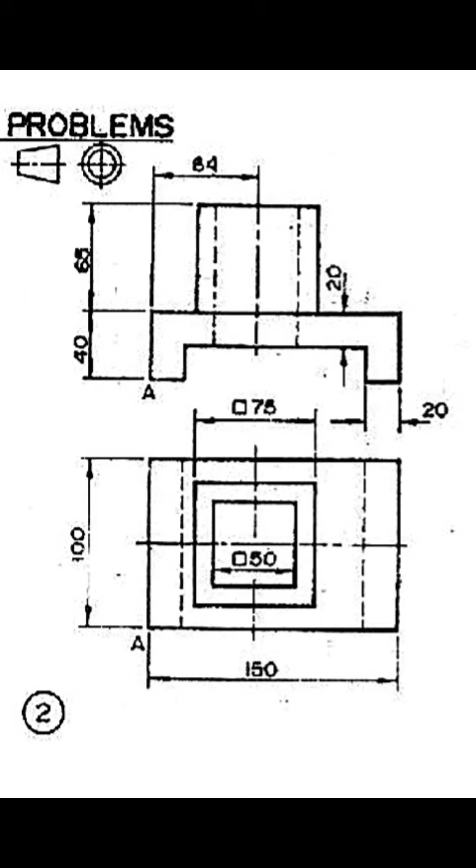In this question, we are given an orthographic projection, and we have to get it in isometric form. So if that is the diagram, then the sketch means we are going to have something like this. So with this sketch now being for the side view, I can sketch it to get it in isometric, how it's going to be.

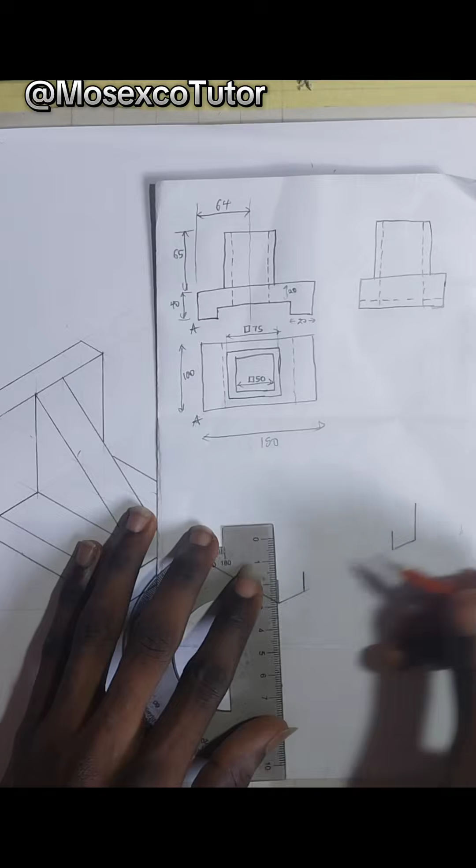The point of view is taken from point A, which you can see from the front view and from the plan. So if we align it, I'm trying to get the sketch. Although it's supposed to be freehand drawing, I'm drawing it without dimension, just to show how it's going to be after construction. And this is what we are going to have.

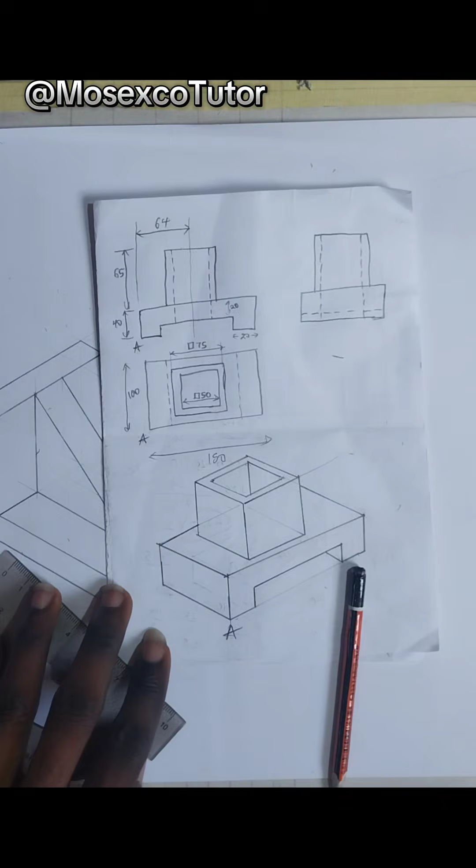Now, from here, this will be our isometric projection. So I put my dimensions so that from this we can see our front view from our right hand side, our side view from our left hand side, then our plan from the top. So this is what we are going to have in isometric form if you are given two views of orthographic.

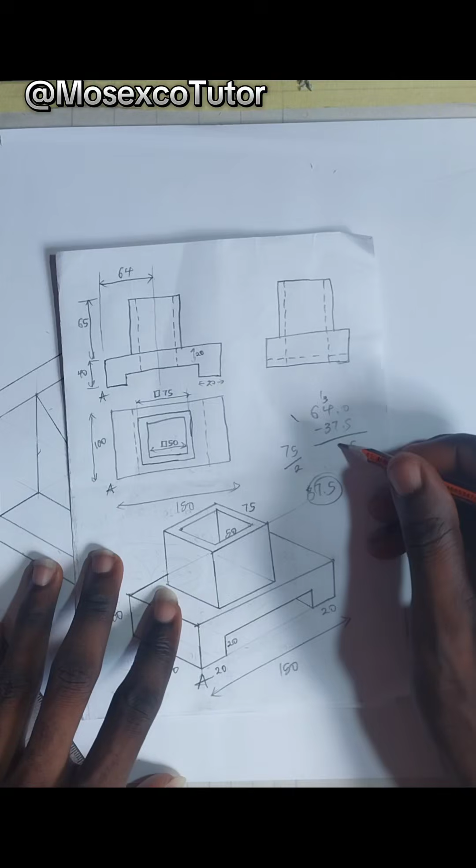Now I try to get the middle part by dividing 75 by 2, then also removing it from 64, so that I can get my 26.5 distance between the two edges.

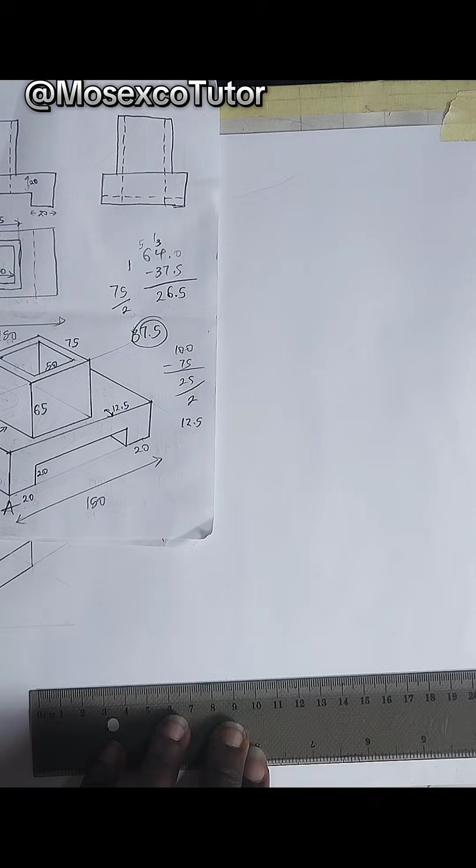Now the first thing to do is to get a horizontal line, but in this diagram I'm trying to use the full scale, unlike the last one I did. So I draw my horizontal line like scale 1:1, and I mark a point.

I use my protractor to get our usual angle, 30 degrees to the left and to the right, and 90 degrees upward, so that this can give me my isoplane left, then isoplane right, and also the vertical axis. So I join them together with a ruler to get my isoplane and to get my lines.

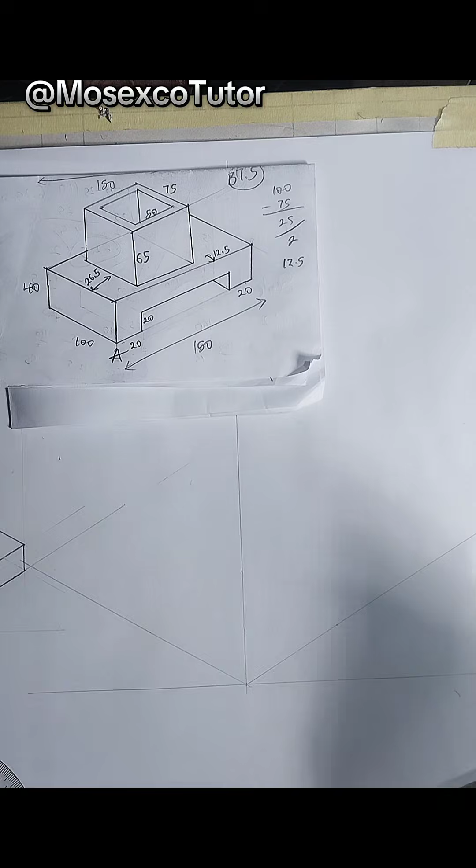Then I start taking the construction one after the other, going with the sketch that I have there. So I started with the first line. Mind you, I'm using the old dimension, no scaling down. So 2 centimeters first, then I mark my point of 15 since the total width is 15.

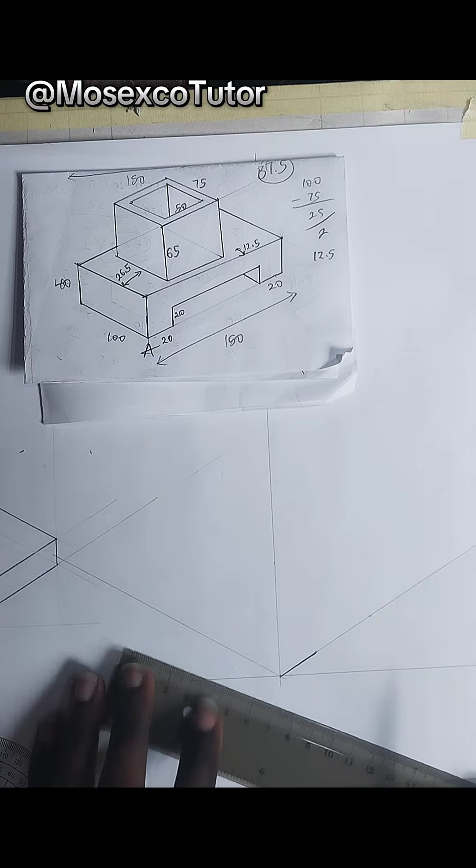Then from that 15, I take 2 centimeters down too. So I have 2 centimeters from this place, 2 centimeters from there, everything in total is 15. Then at the left hand side, that's 10 centimeters, which is the 100 that you can see from that sketch.

Now, after doing this, I get the vertical also. The vertical there is 40, which is 4 centimeters vertically upward. Then I take my ruler and my set square so that I can get my lines from each of these points. First of all, I get the vertical line from this 10 at the left hand side, vertically upward.

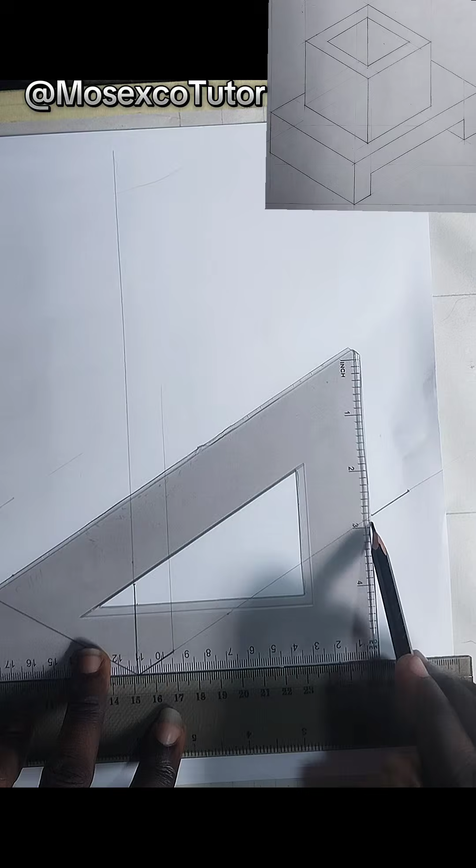Vertical line from this 2, vertical line from the other 2, and from the other 15. Don't forget, everything is done with the help of set square and ruler.

And I get my right isoplane and my left isoplane also from that same point of 4 centimeters, making sure that the ruler is always on the construction line and not shaken. So I extend all lines as faint line, as you can see from the diagram.

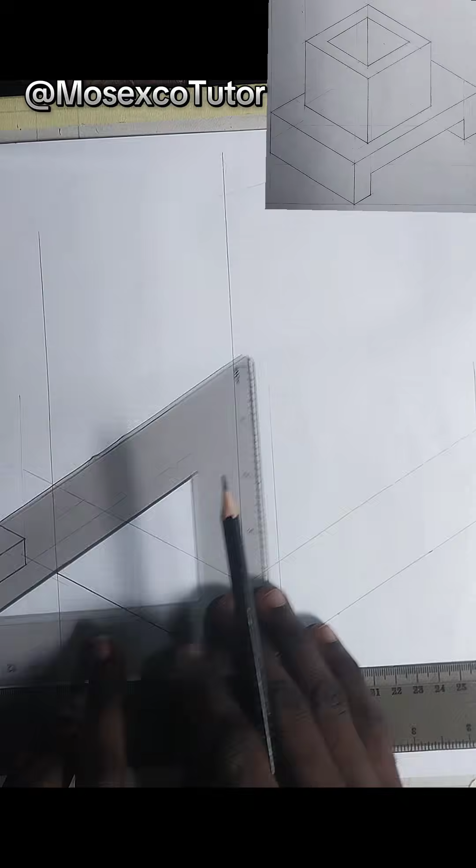Since this height is 4, the other height there will also be 4. So I get my faint line also from there, but I transfer my first construction line upward by putting my ruler on the construction line, then putting my ruler on it, so that I can get that line upward there.

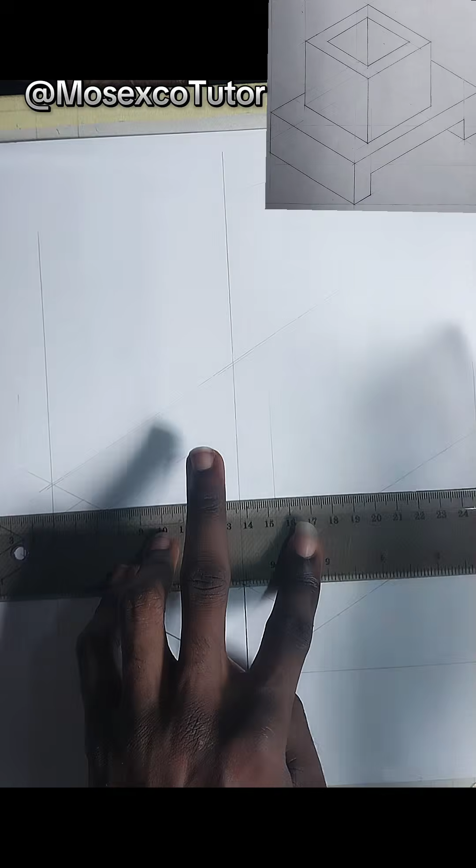So I put my set square on it, then I get my right isoplane from that point of 4 to my right. Mind you, it must be a faint line and it must be done accurately.

Then also, from this point of 15 that goes up there, I get my left isoplane from there too. So I have this structure there.

Now what next? I also get one from the other 2, that down part, as you can see from the diagram. Mind you, everything goes with the sketch that you can see up there.

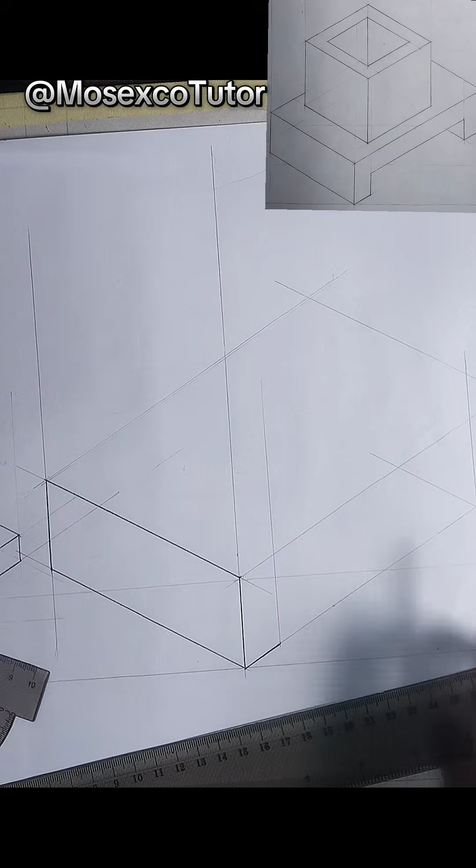So I draw my thick line for this part. I draw my thick line also for the other part, but before I do that, I take the height, which is 2 centimeters upward. So I draw a line of 2 centimeters and a line of 2 centimeters from these 2. I just take my ruler, then I join them together as thick line also.

I join the other 2 parts also as thick line. Then I join the vertical part there as thick line, so that I can get the base at first before I now get the upper parts of the isometric projection.

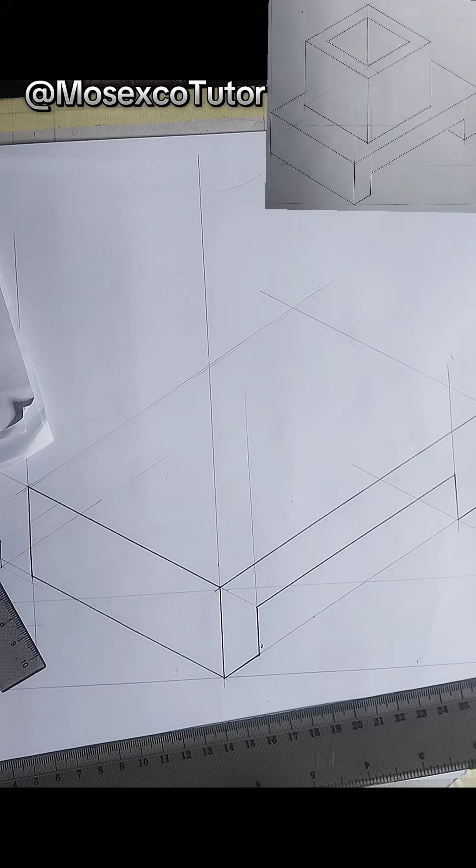Now, taking the next part of the question, I have the distance there to be 2.6, that's where the structure is big. So I'm going to mark 2.65, then 2.65. 2.65 is in between 2.6 and 2.7 centimeters.

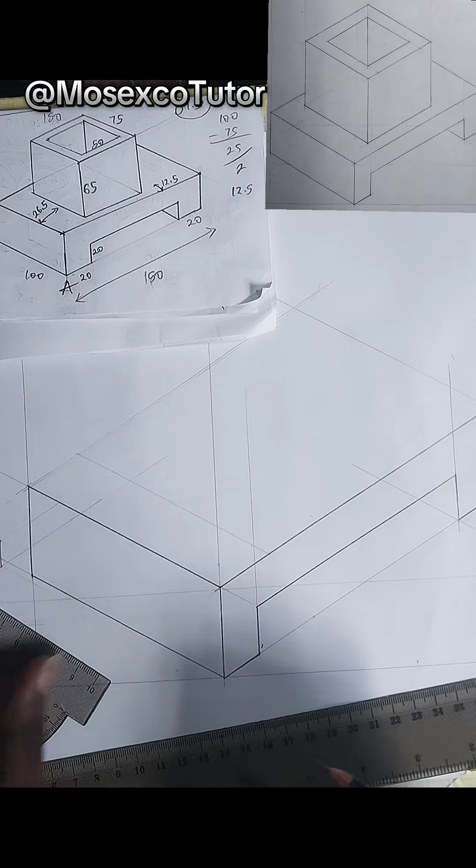So I join it together as a faint line. You can mark 2.6 if you are not sure which one you have to mark. Then after joining together, I also take 1.25.

So I mark 1.25 with my ruler from down, then also from up. Next, I take my ruler, still on the construction line, making sure it's aligned. Then I take my set square on the ruler, slide it, making sure it's from that point of 1.25, and I draw my right isoplane.

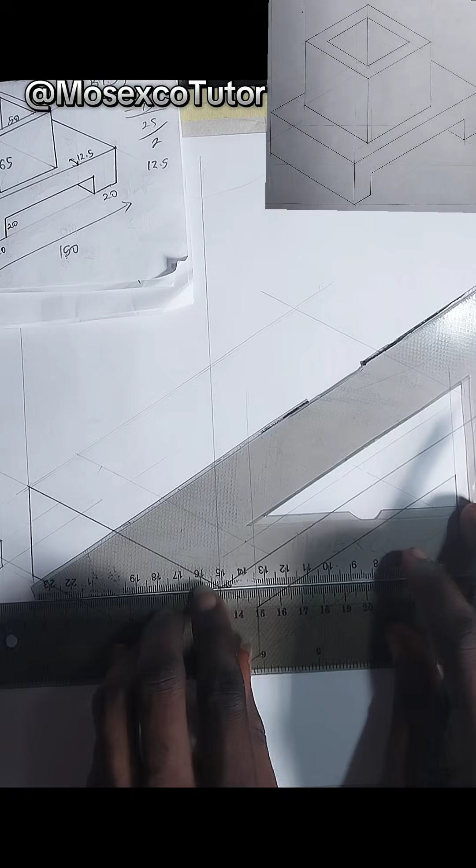Then also from the other points, I get my right isoplane. I put my ruler on top because the radius there is not wide, so since I need to extend that line, I put it on top of the line and get that.

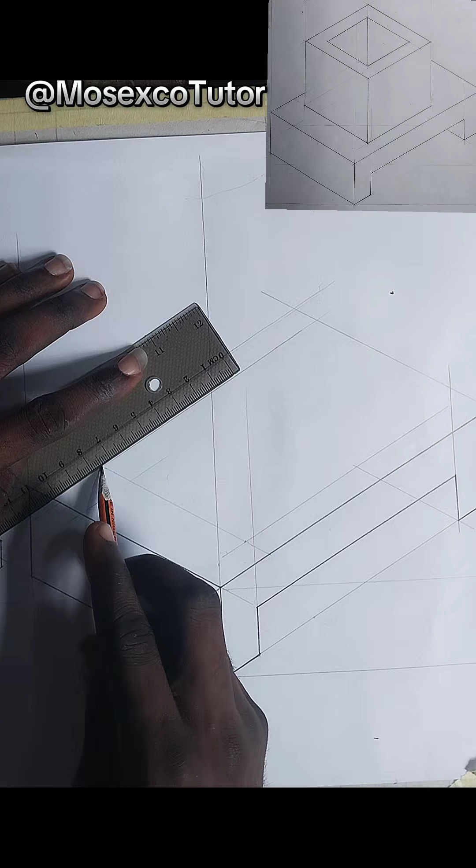Now the upper part is a distance of 75, that's 7.5 centimeters. I get it from this inner part of that 1.25, so I mark my 7.5. I also mark 7.5 from the other points of the same 1.25, and join together as thick line. But the upper part is not supposed to be a thick line, so I erase it and continue with the next part. So it's only these two down parts that will be thick line.

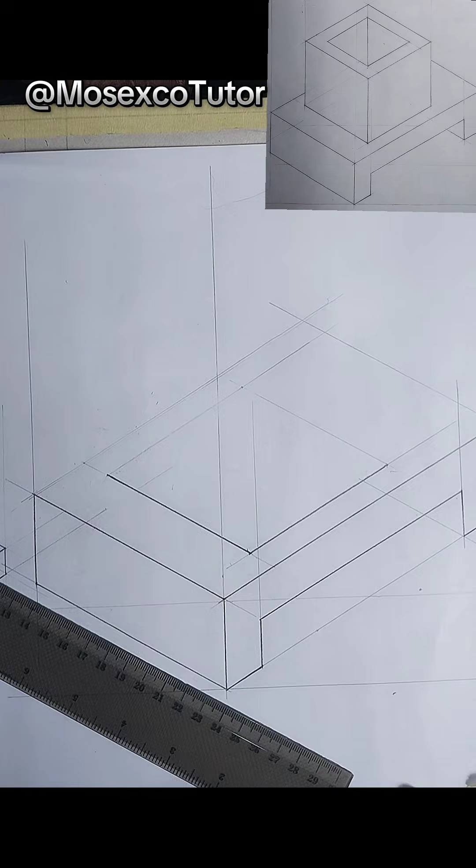Next I continue, I want to get a vertical line from the 3 points of those 7.5. Let me show you: vertical line from this point here, vertical line from the middle point of that 7.5, then vertical line from the last point of this 7.5 also.

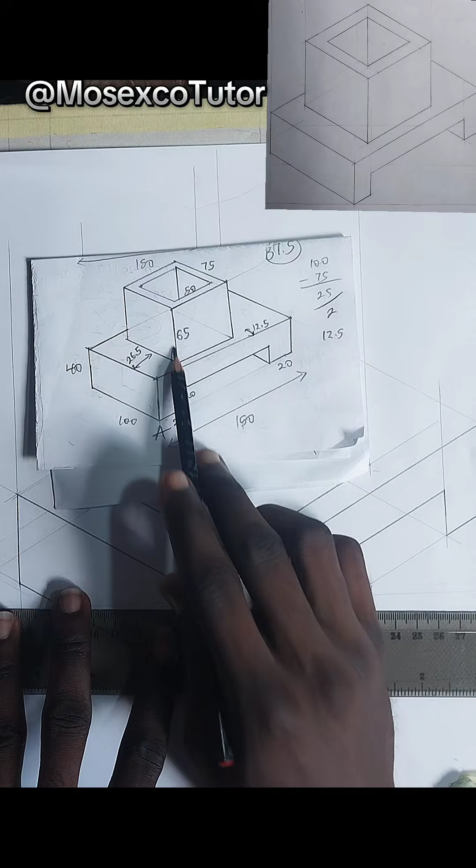That's 3 points. Now from those 3 points, the height is 65, that's 6.5 centimeters. So I draw 6.5 from this point, 6.5 from this middle point, and 6.5 from the extreme points also, so from each point, 6.5 centimeters.

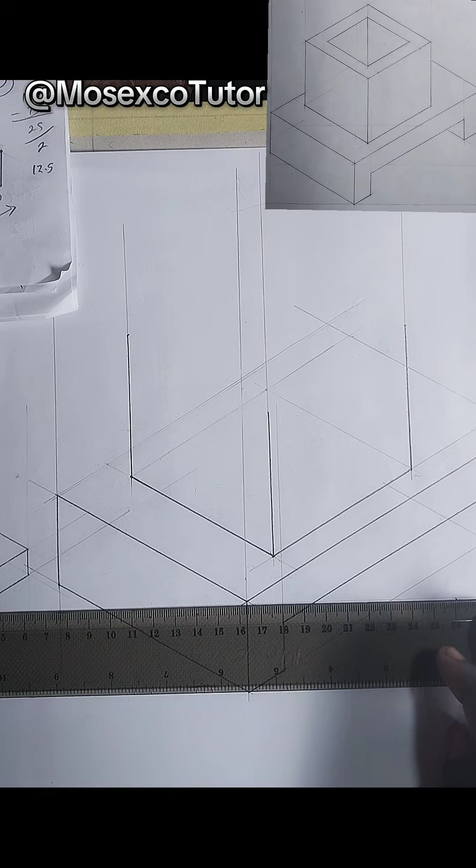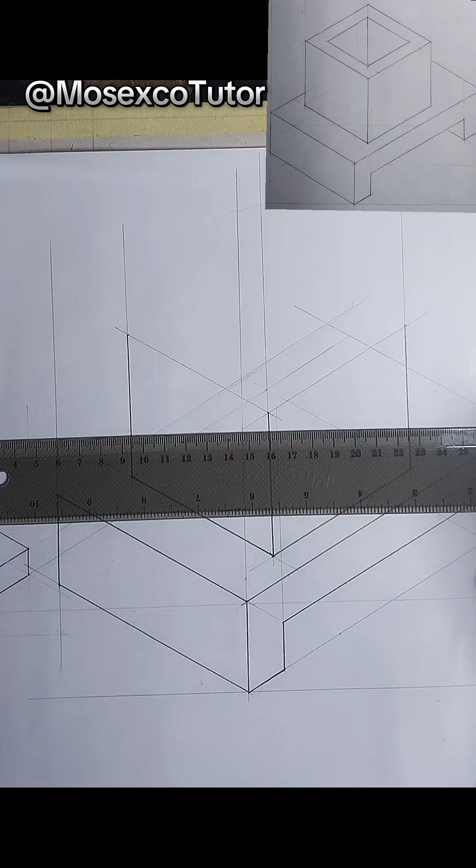Then I put my ruler still on the construction line, then take my set square. So with my set square and my ruler, I join, my ruler still being aligned on the set square, I join the right isoplane together for the 6.5 and the left isoplane together for that also. Then, still with my set square on it, I try extending the vertical line upward a little bit.

So I also put my set square on the ruler and get my right isoplane from there. You can see how my ruler moves from down to up, making sure the lines are also parallel. I also get my left isoplane, so that these two can intersect up there. Now, from there is already 7.5, so I join them together, the top also as thick line.

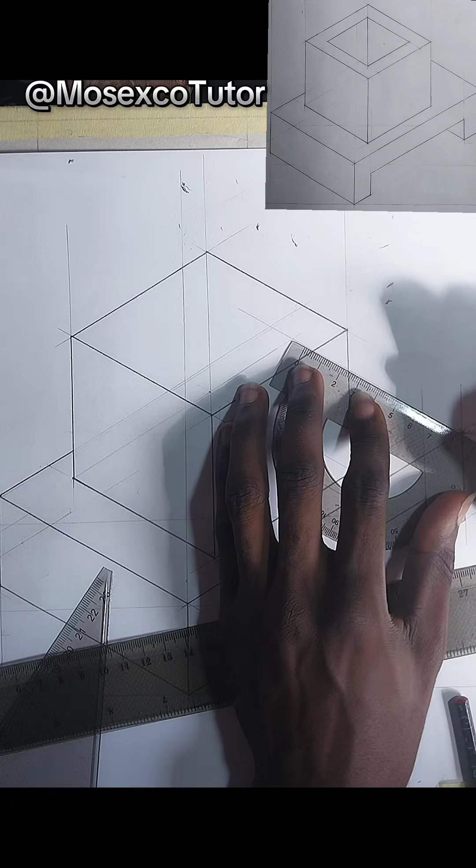Now what remains from that sketch, or from the diagram you can see up there, is the middle part. Let's continue and get the middle part. This is isometric projection, gotten from orthographic view, specifically from first angle orthographic projection, given two sides only. So I join these parts to be thick line, as you can see from the main diagram, then take out the faint lines that will not be necessary in this diagram.

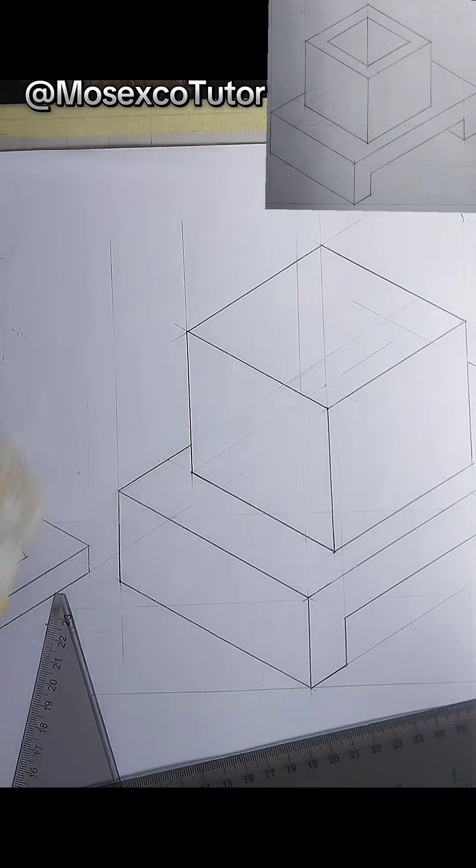Up next is to get the middle parts of that structure, which I will be showing now. In isometric projection, we make sure that it's only the main diagram that will be visible, while other lines should be as faint as possible.

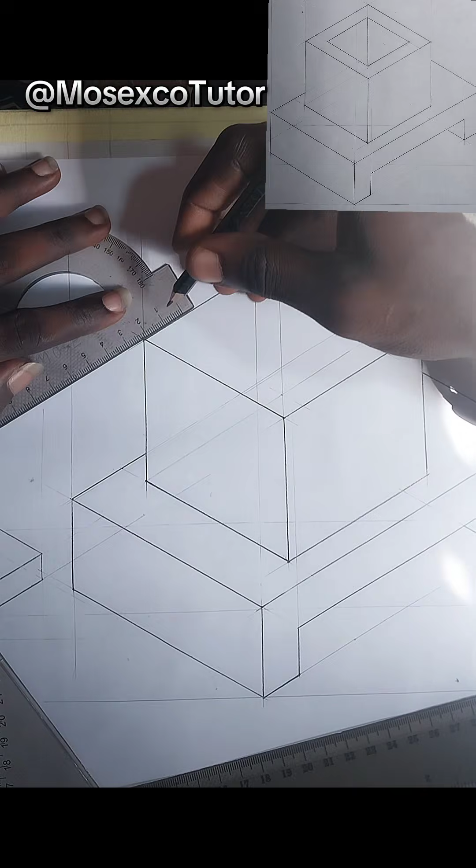Now the upper part there is 50, that inward part is 50. The distance between 50 and 75 is 25, divided by 2, that's 12.5. So I make use of the 1.25 distance so I can mark this middle part, making it a square part. Let's see how it's going to be: 1.25 downwards, 1.25 upwards, 1.25 upwards, 1.25 downwards.

I join them together as a faint line first. I'm sure you can see that clearly, so I join them together as faint line.

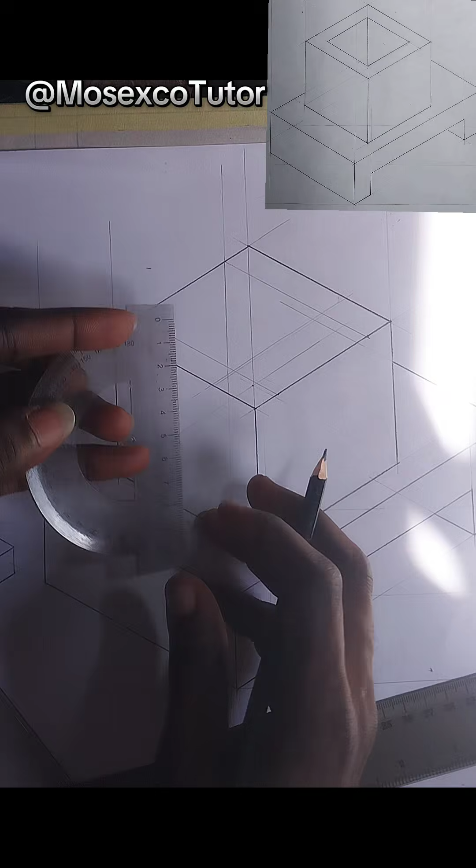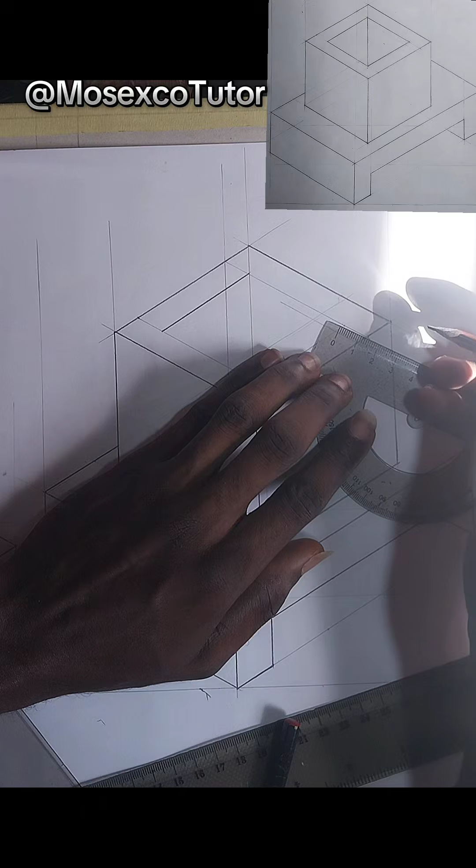Next, 1.25 again from this line that I just drew, so 1.25 from each of them, 1.25, then 1.25. I join them, so in between I can join them as thick line. Then the other one also 1.25, then the other part too, taking the measurement accurately, 1.25. I join them together as faint line also, as thick line. So making 1.25, 1.25, I join together as thick line, and join the other part together, and the other part together.

Now from here, I already have the last line, so I join. So this is the isometric projection of a given structure. Initially, the diagram is given in orthographic, first angle orthographic projection.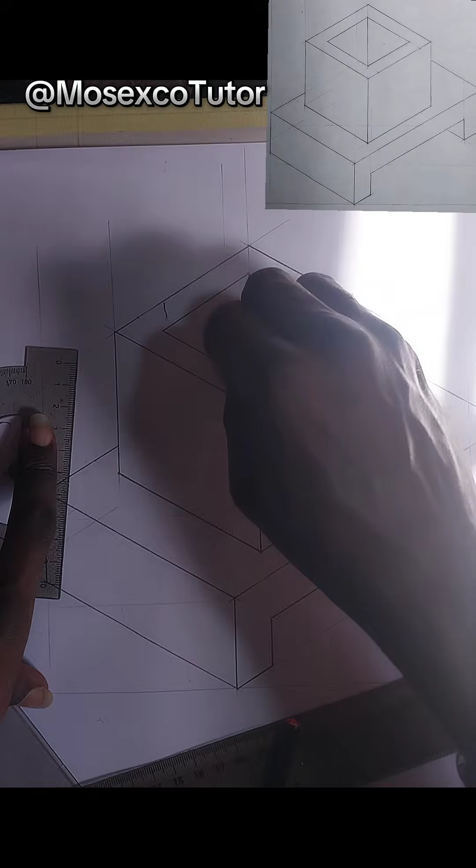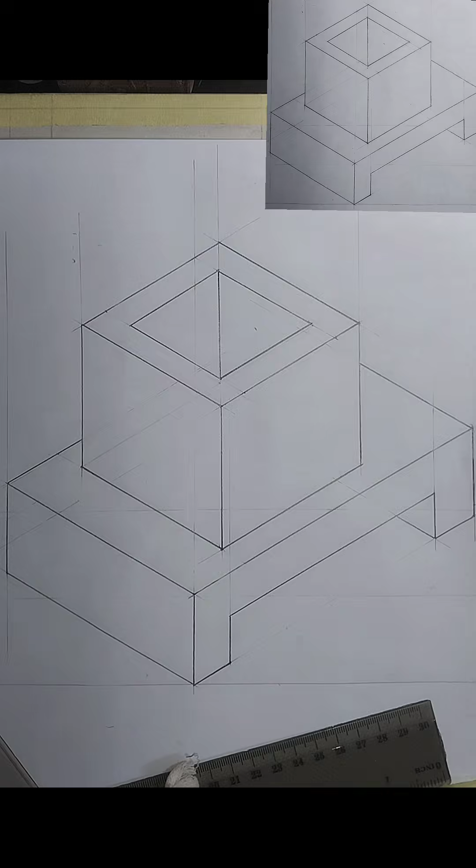But what is being done? We convert it to isometric. So when you see a diagram in orthographic view, how do you know what to do? It's firstly to sketch it out. How is it going to be? You imagine it in real life form. How is it going to be if this is a block work, if this is a structure, how will I bring it out in isometric? By putting all the dimensions, using the scale. So this is how it's been done. This is an example.